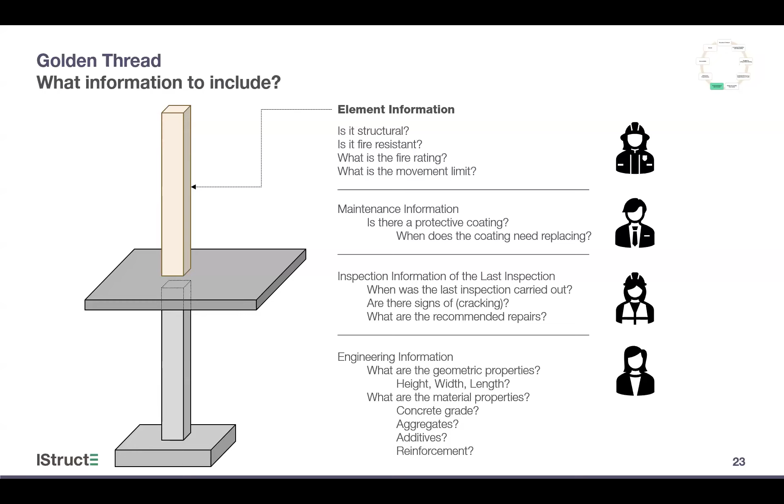An engineer would need to know geometric properties like height, width, and length, or material properties like concrete grade, the additives added, or the reinforcement details. This helps ensure all relevant information is captured, tailored to who will use it and when.

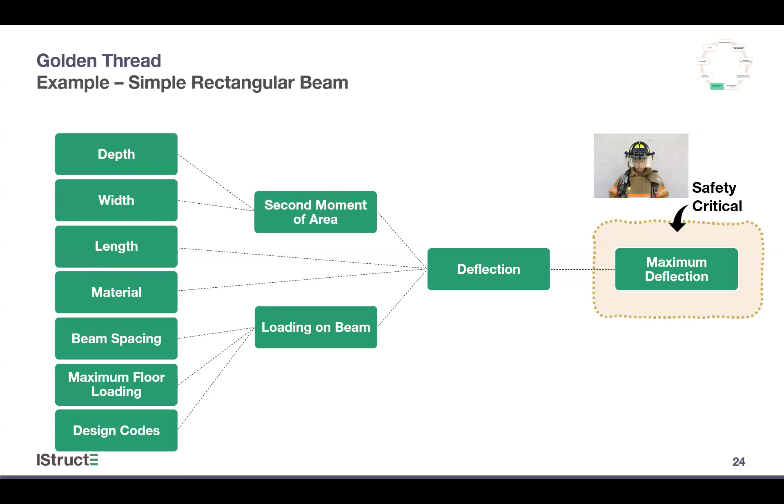As a simple example of what should be included in the golden thread, let's say you need to calculate the deflection of a beam. While there are many variables that would typically be considered, in this case, let's focus on the maximum allowable deflection. The building manager doesn't need to know all the detailed calculations. They only need to know the maximum allowable deflection to ensure the beam is performing safely. This type of information should be included in the golden thread as it's important for the building's performance and safety. But if the maximum deflection is exceeded, it can become safety critical and needs to be known by the emergency services. Another example of this could be the fire rating of an element.

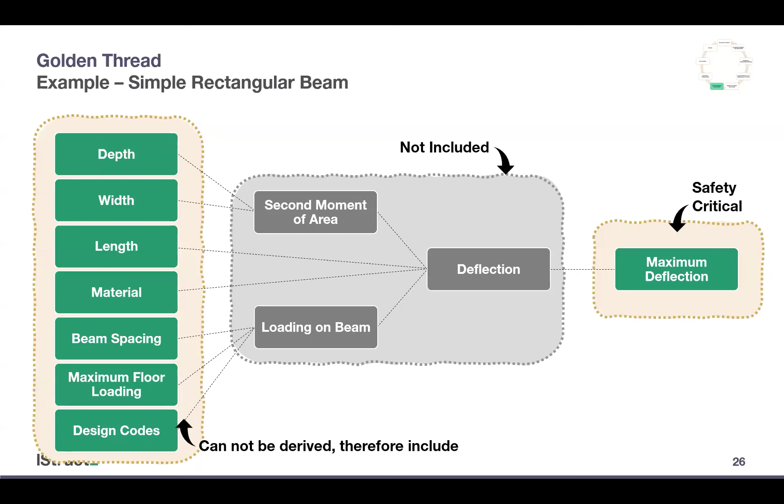In contrast, some information cannot be easily derived and must be included in the golden thread, such as the depth of the structural element, the spacing of beams or supports, the maximum floor loading. This information is essential because it provides immediate insight into the building's design, and it can't be calculated on the spot when it's needed. It's important to remember, though, that things like the second moment of area or the loading conditions can be calculated by an engineer when they're needed from that existing information, and it's also not safety critical or required for the building's maintenance. Therefore, it should not be included in the golden thread.

To give you a clearer picture, let's apply this process to a structural element, in this case, the column we looked at previously. The column information could largely be captured as simple metadata in the BIM model. This includes its dimensions, material properties, and basic safety features. The slab that it's connected to, however, is a lot more complex. Most of the information can be included as metadata, but since the reinforcement within the slab varies along its length, this requires more detail than can easily be stored in the BIM model. So 2D DXF drawings can be included as a supplement for clarity.

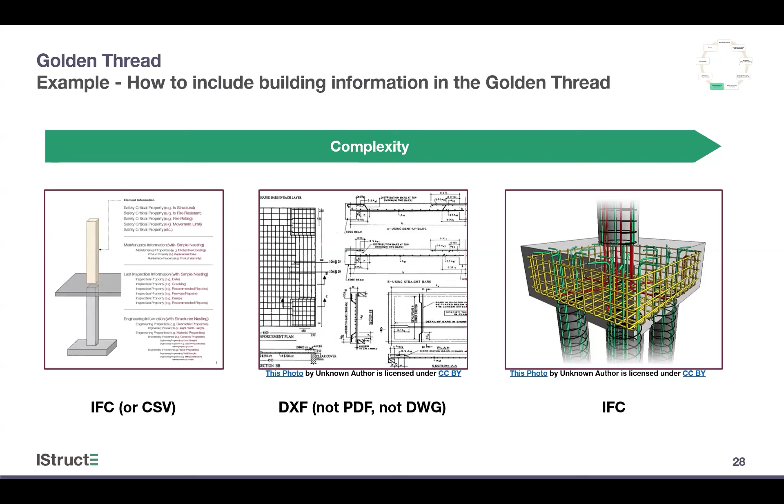This approach helps ensure that every element is represented in the most efficient and understandable way based on its complexity and the information needed. If you use DXF files or a local IFC model, it's important to remember that you still need to apply the metadata to the main model, especially that information which is safety critical. This approach should only be used to supplement the model with additional information.

Another example could be for sections of steel or aluminium elements. It's important to capture information. Standard historic sections can be hard to look up, but if you have metadata that lets you know, for example, that it's a PFC and provides you with the dimensions, you can work out the rest. Sometimes it can be hard to capture this information as metadata. Aluminium sections, for example, can often be complex. In this case, it's easier to represent the section information as a DXF file and reference that.

If you have a more complex, custom fabricated steel element, you should try and capture that geometry in a local model, which has a higher level of detail than the global, capturing the information needed for a future engineer to undertake an analysis of that element.

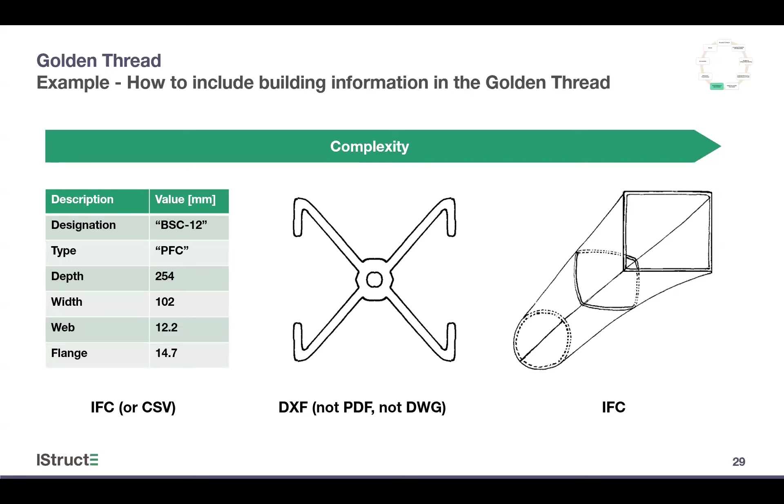Just a reminder, though, that it's not only design information that needs to be included in the golden thread. According to the legislation, information about the last inspection must also be included. That includes when an inspection is carried out. The previous inspection information must be removed from the golden thread to keep it up to date. This is different from the health and safety file, where inspection information is added but not replaced. So each inspection should capture the following: details of the person undertaking the inspection, repairs needed or identified during the inspection, and a confirmation that any previous repairs have been carried out. This ensures that the golden thread is a live, accurate record of the building's condition and maintenance history.

So this brings us to an important point: when to update the golden thread. According to the legislation, the golden thread must always be kept up to date. Simply put, the golden thread should never be out of date. It's not just about adding new information, it's about ensuring that outdated or irrelevant details are removed as needed. For example, when changes occur, whether it's a new design stage, inspection, or any modification to the building, it should be updated immediately. This ensures that the golden thread remains accurate and provides the most reliable real-time data.

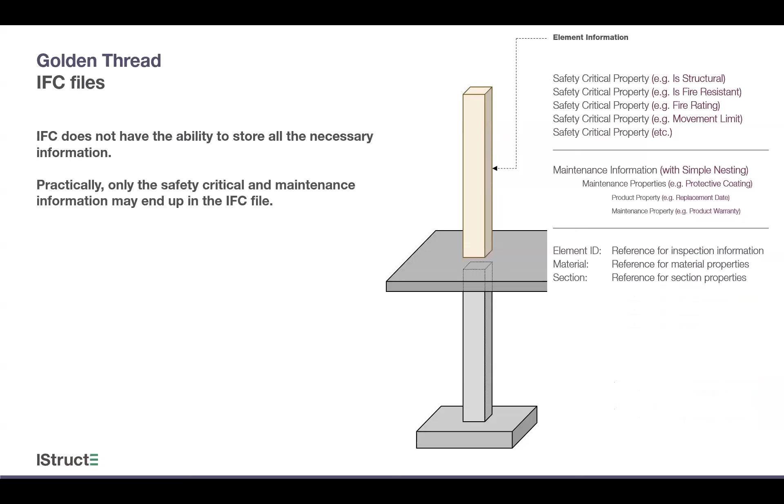I'll move on to a practical example. So while we've discussed capturing information into the IFC file, it's important to acknowledge the limitations of the current IFC format. The reality is that the current version of the IFC format doesn't fully support all the necessary data required for the golden thread. From a practical perspective, while the IFC format is being expanded to capture all this information, only the safety critical and maintenance information may end up being included directly.

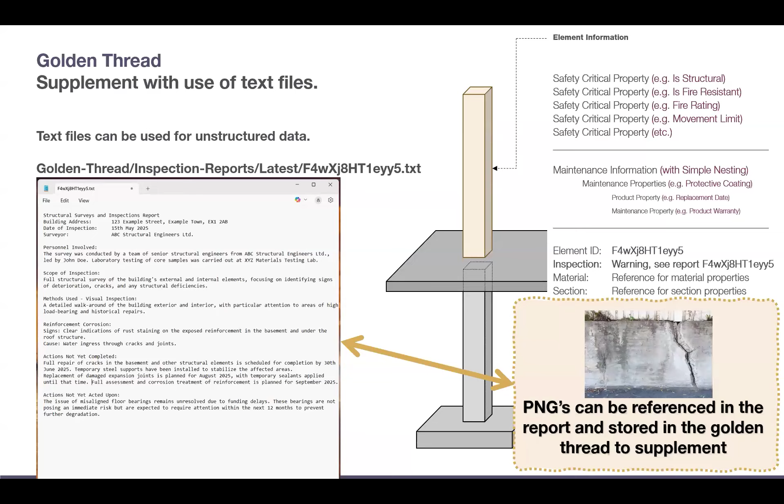Text files can be used as a good supplement and reference for unstructured information. For example, inspection reports. In this case, we just reference it to the element ID. The information in the golden thread is just a concise summary of the issue, what it means, what repairs have been recommended, what repairs have been carried out. The full inspection report would sit in the health and safety file.

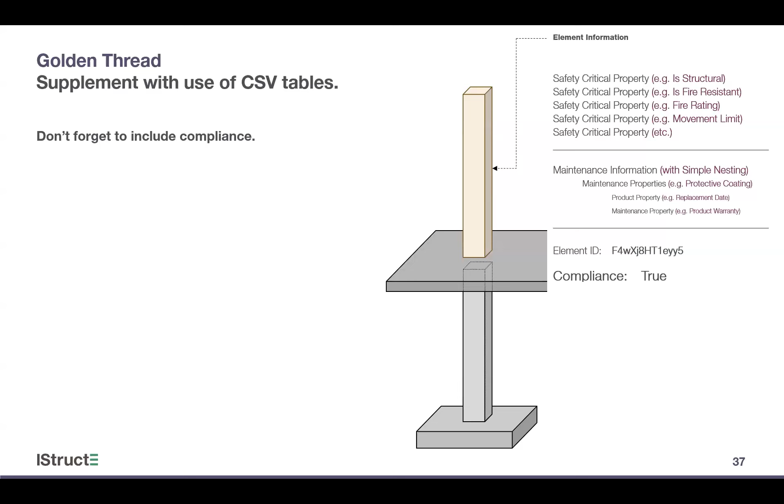Don't forget to include compliance. That could be a simple indicator that the element is compliant, or it could provide a short description of what the consequences are, so what's needed to be known, and provide a reference to the health and safety file for further information. But what's needed to be known is what the emergency services need to know, what the building manager needs to know.

Where highly structured information is required, alternatives include JSON files, where the information about, say, the materials can be provided in a hierarchical format. For those who've noticed the lack of units in this example, we're working on some guidance for what to include and what recommended units to use.

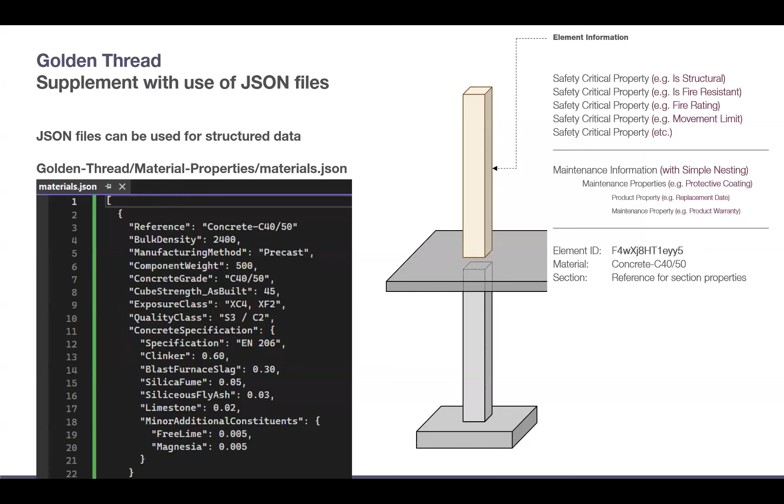The vast majority of information may be easier to store in CSV files. So this could include things like section properties. In this case, it just means you may need more files for the different section types, but unlike a JSON file, the information is structured in a way that's easier for most engineers to understand and edit.

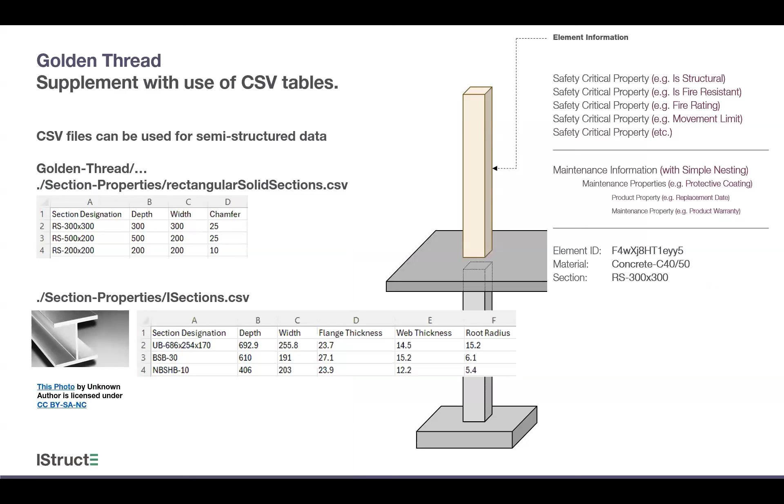CSV files can also be used to store your references to the health and safety file, although it may be in some cases that they ask for this information to be included directly in the golden thread. We'd still suggest in this case that this information be kept as PDFs and referenced, because this information should remain static. You would not want someone being able to alter your competence declaration, for example.

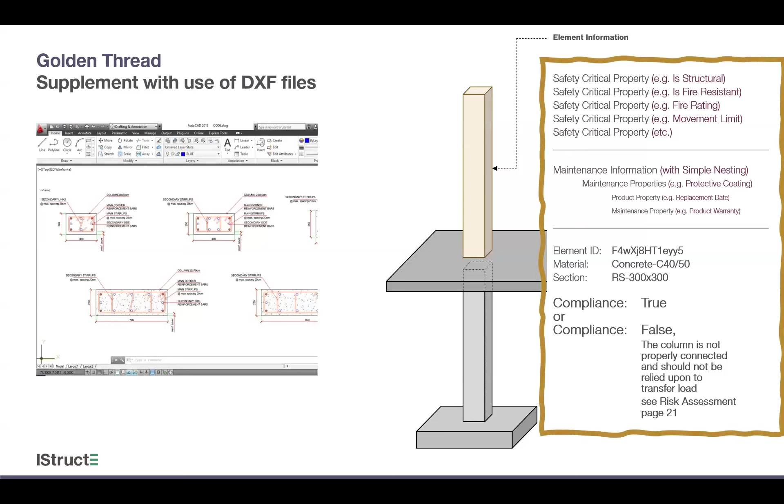And remember, you can supplement with DXF files. That does not mean you can simply submit all your drawings in a DXF format, because the text within it is not structured. DXF files should be used to provide additional geometric information, such as rebar layouts or unusual section profiles, but you must include any information that can be stored as metadata in a structured searchable format like IFC, JSON, or CSV.

So slightly contradictory to the concept of staying with active, up-to-date information, there is an additional requirement to store information integral to the building's original as-built condition permanently within the golden thread. This is to ensure that future designers and stakeholders have access to the foundational data, facilitating informed decision-making and maintaining the building's structural integrity.

If you're working on a building now and modifications are made in, say, 2027, 2050, and 2055, whenever the golden thread is updated, anything about those modifications that is no longer relevant gets removed. Anything that remains relevant stays within the golden thread. However, alongside the most up-to-date current information, that original information that you put together stays with the golden thread for its entire lifetime.

So resources, we've got some IStructE guidance coming out, so this will be published soon. It contains further information about the legislation, more practical examples of what to include and how to implement it. In addition to this, we're also working up a digital standard of the information to be included within the golden thread, which will be available on the IStructE website and contain common elements and material types.